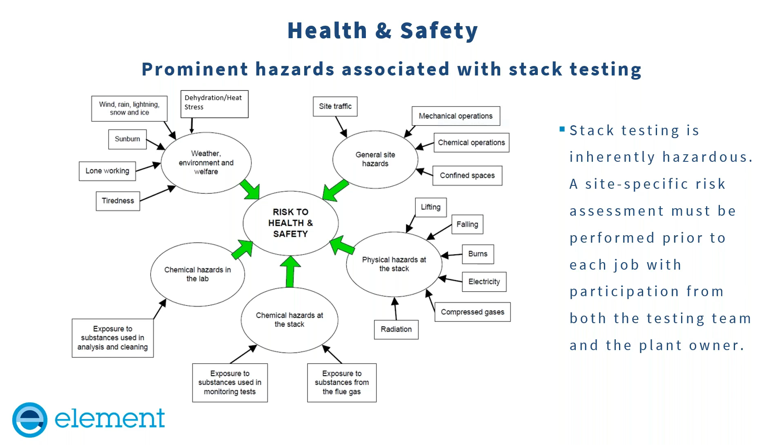So there's just some general risks there. I'm not going to go through them all, but as Stan said, this will be on a recording, and please take your time at a later date to look through these, and always take them into consideration when you are doing this type of work.

I think it's probably well worth pointing out that we are looking at point source emission testing, so it would be very, very useful, one would imagine, to at least decide what a point source is.

By definition, it's a single identifiable source of air pollution with a negligible area. It can be modelled as a single point, as a mathematical point in various modelling. It does not include diffuse areas of pollution such as roads or whole refineries, airports. It is quite simply a small single point located source, which may be a chimney, it may be a generator stack, or that type. But they're obviously very common, and it's worth having a look.

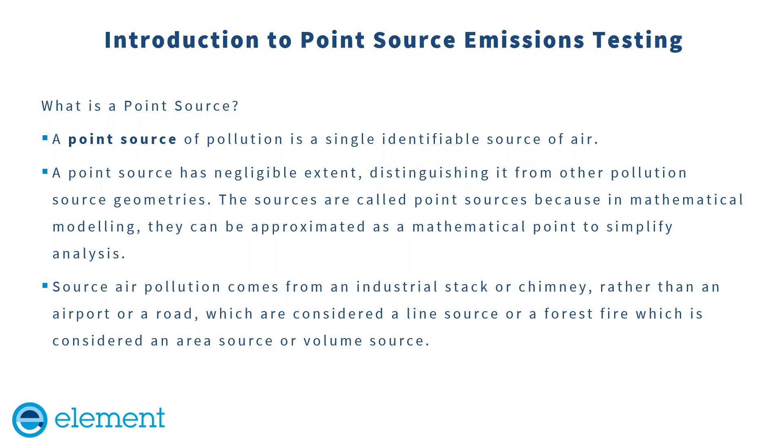and considered as a point source emission. We also find similar vents or stacks in industrial processes, refining, food manufacture, all sorts of industrial processes where those processes involve emissions to atmosphere. Even within petroleum industries, as I said, I'm based in the Middle East. A lot of refineries have point sources as well, where they are disposing of waste gases, solvents, etc. They may be flares. All of these are classed as point sources.

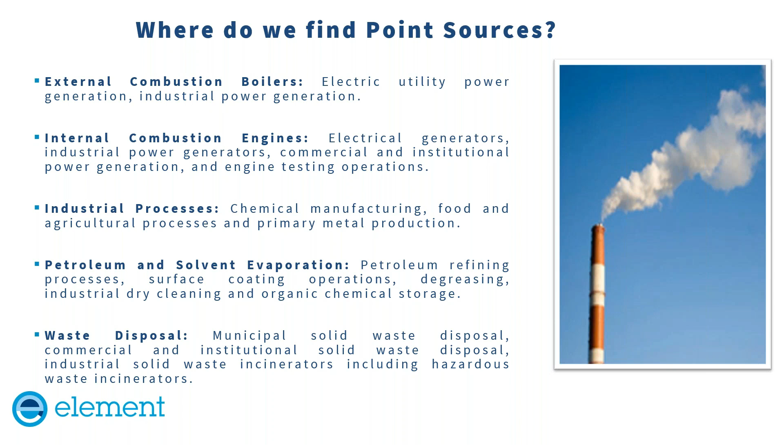What would not be classed as a point source in something like a refinery would be fugitive emissions from pipelines, etc., covering the whole area of the refinery. They're more diffuse and would not be taken as point sources. Other very common areas, waste disposal, a lot of interest these days in waste to energy. But clearly there are hazards or risks associated with burning waste, industrial waste, commercial waste, hospital waste. All of these incinerators have to be working efficiently to obviously ensure that there is no release to atmosphere.

In terms of doing the actual monitoring itself, as I alluded to earlier, there are three main ways of doing this. In the older type plants, this is done manually by periodic measurements by companies like ourselves, perhaps. We will come along once every 6 months, once every year. We will physically monitor the emission gases within those stacks using a number of techniques, methodologies, equipment that we'll talk about later. That is done in smaller plants, or in older ones, but more and more on larger scale type refineries, plants, certainly in power stations.

There is a requirement now from regulators, both nationally and locally, that these stacks will contain what's known as continuous emissions monitoring systems, or CEMS, where those effectively do what we do, but they have all of the emissions monitoring equipment installed into the stacks, so that they are giving real-time emissions data that is provided to the plant operators. And more and more these days, that real-time data is fed directly to regulators. So the regulators can be checking whether these plants or these particular stacks are meeting their emissions discharge consents.

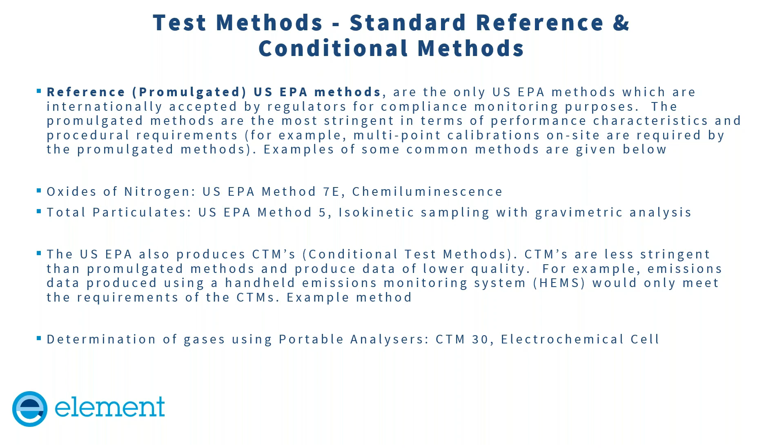So there's a place for both of these methods. Element carry out both, but in general, as I said, the reference methods are used for regulatory purposes. The conditional test methods are used as a rapid indication of plant operation, and if you're meeting those legal requirements. Move on from there. As I said, looking at the reference methods themselves, generally split into two as well. Sorry about breaking all this down into different bits, but you will have time to look at this online.

They're broken into two main categories: direct reading instrumental techniques, which are generally used for gases, where we are taking direct readings within the stack, and secondly, manual isokinetic methods, where we are abstracting gas from the stack, trapping that material onto filters or in some sort of trapping medium, caustic or acid, and then taking those samples into a laboratory for subsequent analysis. Isokinetic sampling is done for particulates and anything that may form particulates, such as PAHs, dioxins, metals, etc. They're not being read directly in the stack, they're being tested for outside.

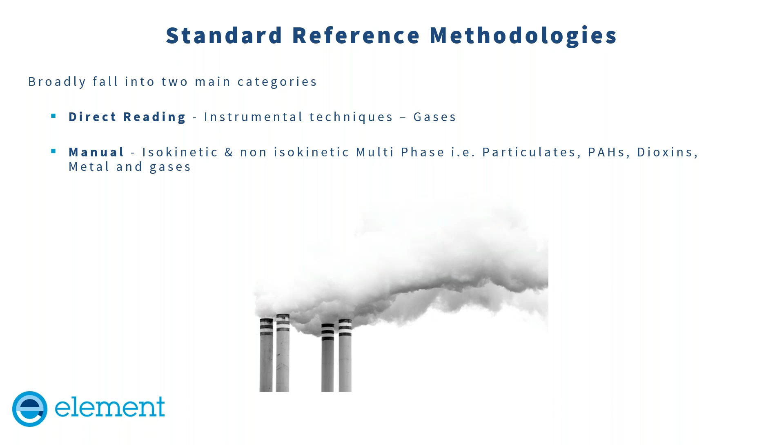In terms of direct instruments, just while we're on this, you can see a couple of very large stacks there, and you can see the platform at the top. That's where companies like ours or our staff would be operating at great height, and the analysis is performed in an air-conditioned lab at the bottom. There's a lot of equipment to be carried up there at great heights, so just to point out that all of these sort of things have to be taken into account.

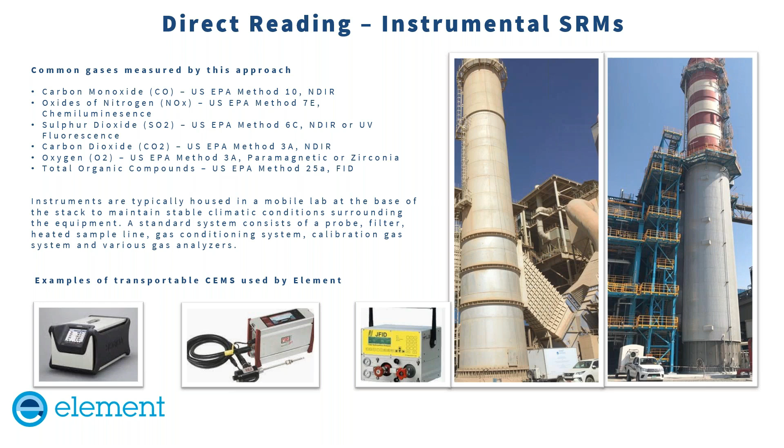As I was saying, there are also conditional test methods. You can see there the type of equipment that's used. It's a lot simpler. It will do multiple gases at one time and can be carried up, direct reading in the stack, US EPA CTM 30. Very useful, simple to operate.

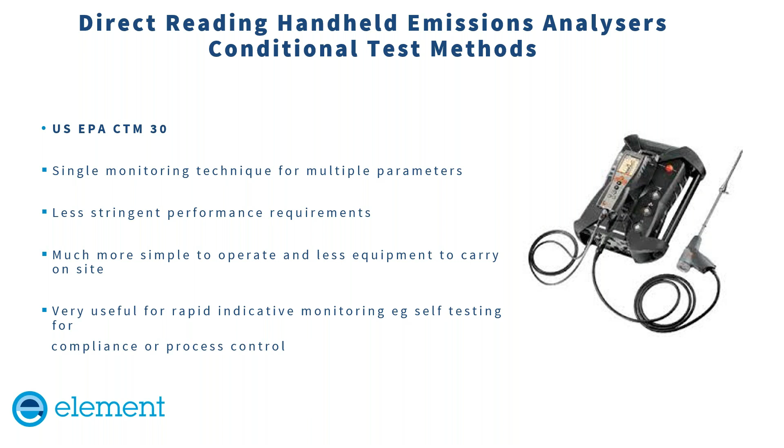It gives rapid, fairly accurate results. Very useful for just checking your own compliance, maybe getting information for process control or optimizing parameters. Very, very useful technique, and there is always a place for it.

Isokinetic sampling, as I said, is used for particular types of possible pollutants, such as dust, clearly PM10 or PM2.5, but also anything that will be trapped as a particulate, like metal particulates, even acid gases that will be in particulate water, any of these sort of things.

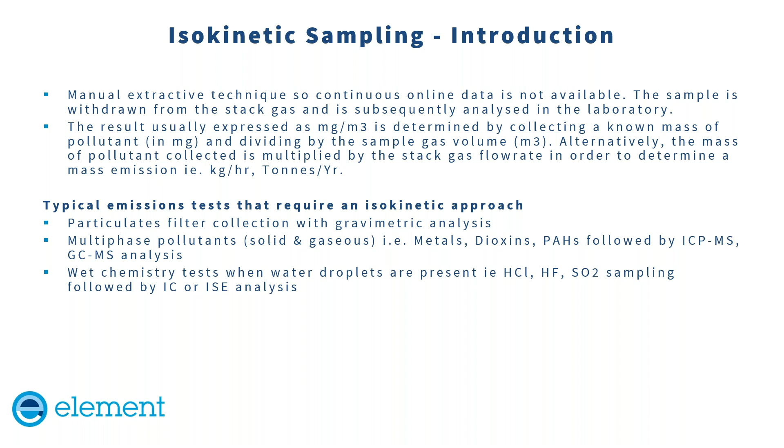So it's very important, because the analysis is not done directly from the stack gas, but we are taking a sample of that gas, trapping the contaminants in a medium, such as a filter or through acid or even in water. Then it's extremely important that we are able to extract that sample in such a way that we can tie the rate of that abstraction to the rate of flow within the stack, so that we can calculate the results in a meaningful manner, either as milligrams per cubic meter within the stack, or perhaps even as total emissions.

So isokinetic sampling, what does it really mean? Well, it's pretty obvious. Iso is from the Greek word meaning equal, and kinetic is movement. So what we are aiming to do here is to abstract the gas from the stack in such a way that we can relate the abstraction flow exactly to the flow within the stack, which will then allow us to calculate the results accordingly. So that's just a little diagram.

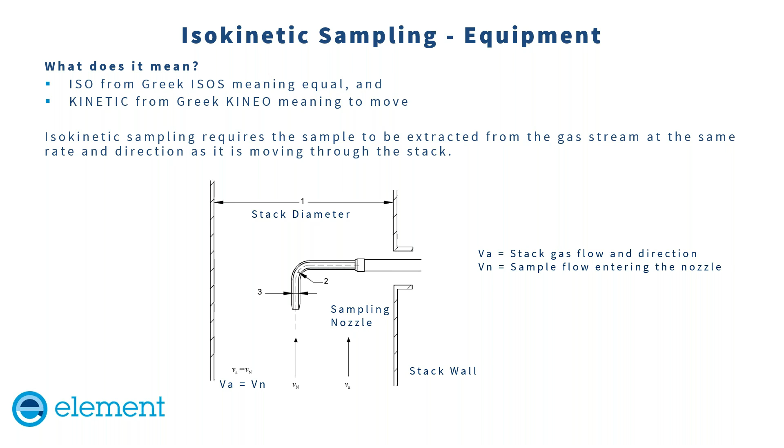So why do we do this? It's extremely important that we can relate the analysis results in the lab to the absolute concentrations or an emissions concentration in the stack. We need to do this because we can't sample the particulates easily, because there will be turbulence within a stack. There are gravity effects. Different thermal behaviors move particulates around.

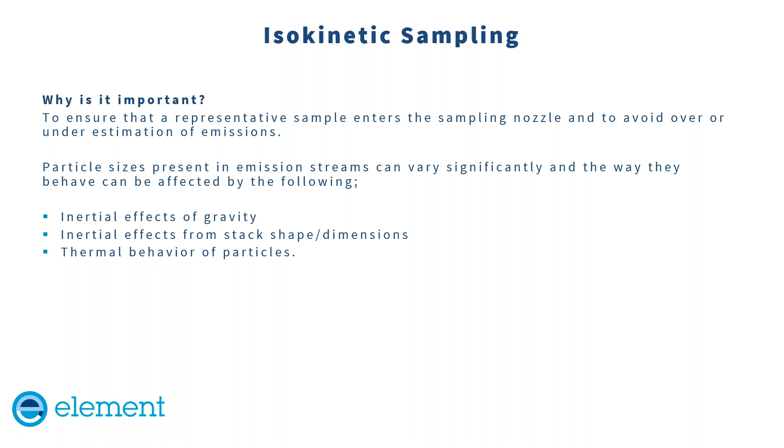So it's extremely important when sampling for particulates that this is done very, very carefully indeed, because, as I said, there may be areas of turbulence within a stack that may be caused by other probes within that stack. It may be caused by bends within the stack. There may just be thermal turbulence. So it's not a simple matter of going along, putting a probe in and abstracting a sample.

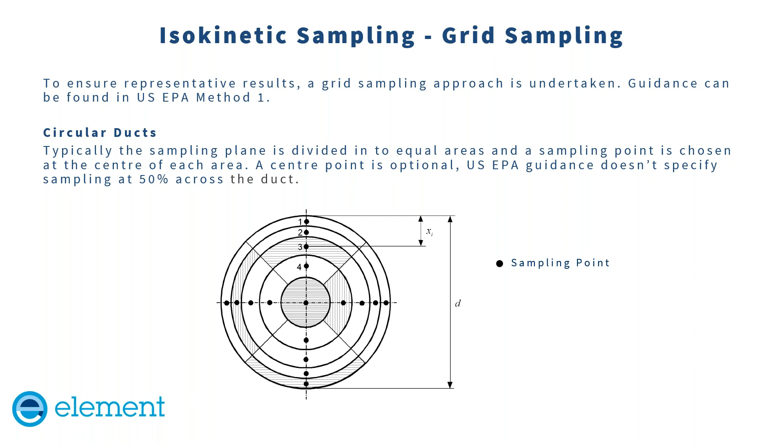Again, for rectangular ducts and other shapes of ducts, there are certain geometric sampling points that we have to be taking to ensure that our isokinetic samples are representative. All of this type of information needs to be known prior to us arriving on site, so that we have the appropriate sample probes and know the number of locations that we need to be taking. So it's all about planning and making sure that the appropriate reference methodologies are followed.

Again, I talked a little there before about the facilities that we will need to do this sampling. We have quite a lot of equipment that needs to go up to these sampling ports.

Some of these probes on large stacks, we are looking at up to 4 sampling probes or sampling points in the stack at 90 degrees. We can usually get away with 2 at 90 degrees in some smaller stacks, but all of those types of sampling ports have got to be there. We've got to know that before we start.

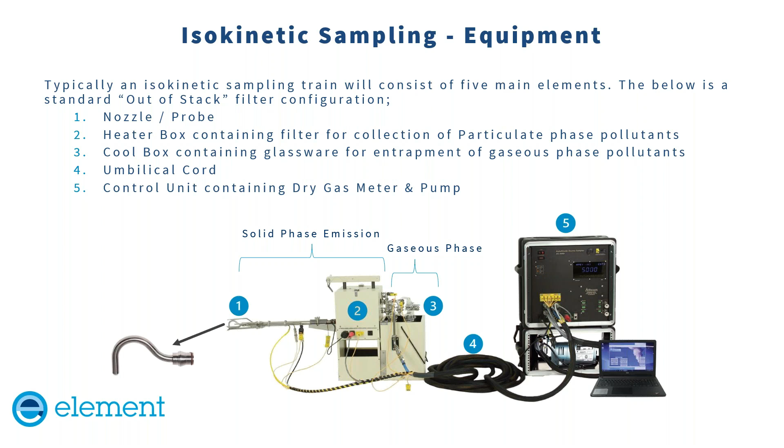So again, it's not just a case of putting that on someone's back and climbing a ladder. Are there winches there? Have they been tested? Is there sufficient room for us to be putting this equipment on the sampling platforms? Just to give you an idea of what this stuff looks like. Just to go through that again.

Where are we looking to put these sampling locations? That's very important. We want to avoid disturbances within the flow as much as possible, away from bends or fans or any other probes that may be present. We're looking for ideally a vertical sampling plane, but we can do it horizontal. We're looking for reasonable flow rates, so there's not too much swirling or flow within the sampling ports.

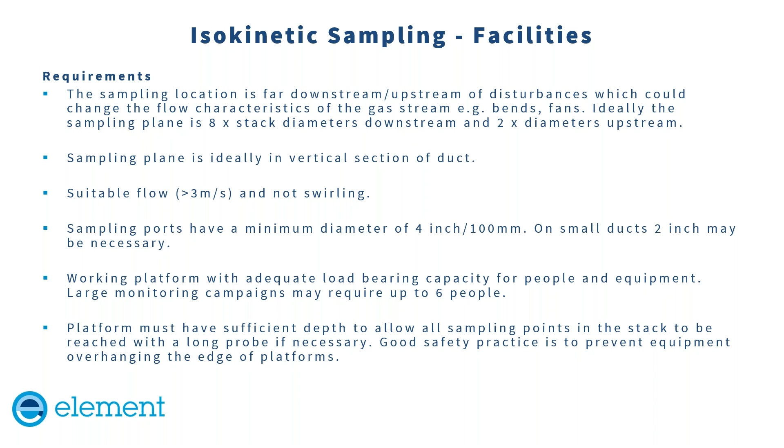If you're doing isokinetic sampling, we're looking at preferably 4 on large ducts or stacks, 100 millimeter to 125 millimeter diameter as a minimum, to allow us to get the probes and the sampling ports in there. And again, I've said before that the platform has got to be adequate in terms of load-bearing capacity, winches, getting a number of people up there safely and operating safely. So all of these things are things to consider when we're doing this.

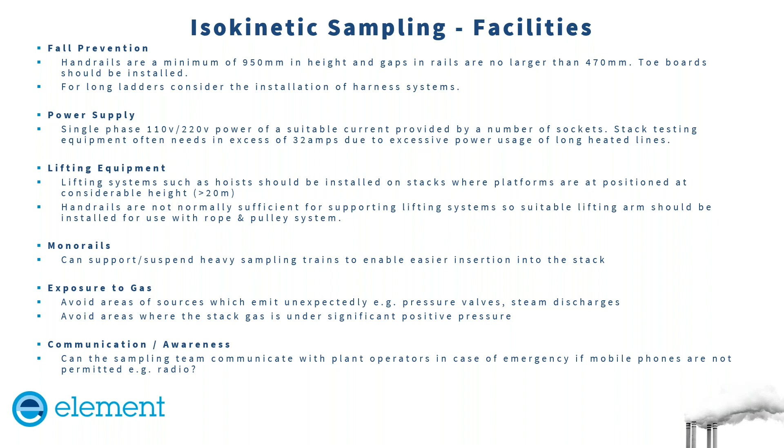Again, just having a quick look at this, and as I was saying at the very beginning, this type of work is inherently dangerous. So it's very, very important that each and every one of these potential risks are looked at and considered prior to starting any site works, to make sure that everyone is safe.

That covers quite simply a lot of the manual periodic monitoring that ourselves and various other companies like us would do on behalf of clients. Generally, for clients who don't have their own emission systems in place, we would do this on a 6-monthly or a yearly basis, provide them with the data that they can provide to their local or national regulator to ensure that they are meeting their discharge consents.

In the last maybe 10, 20 years or so, more and more requirement is coming in, certainly for larger plants and for new builds, that these stacks are equipped with what's known as continuous emissions monitoring systems. As I said earlier, basically these systems are what we do, but built into the stack themselves.

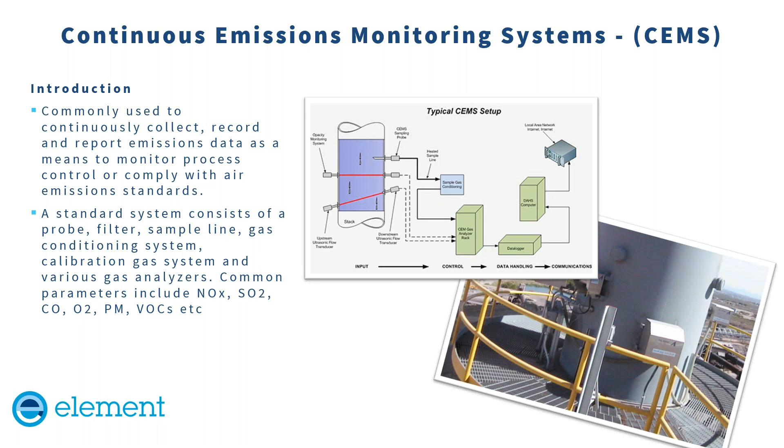This can then be used, as I said, not only for real-time data for regulators, but also to allow the plant operators to optimize the processes. Very commonly, CEMS will do NOx and SOx, etc. However, that's all well and good, but how do you prove that these CEMS work?

For two reasons. If you're a plant operator, then you may purchase a CEMS or as part of the commissioning. But clearly, you want to know that once that CEMS has been installed, it is meeting the requirements that you set while purchasing it. And also, the regulator will require that the operators can prove those CEMS are working before they will give them a license to operate. So there are quite a lot of standard CEMS quality assurance procedures.

We do a lot of work out here in the Middle East based on US EPA standards, but certainly we also do work on European standards as well, and I'll talk about them in a minute. But in terms of the US EPA, for CEMS, there are two main regulations: US EPA 40 CFR Part 60 and Part 75. So what are the differences in these? Let's have a quick look at that.

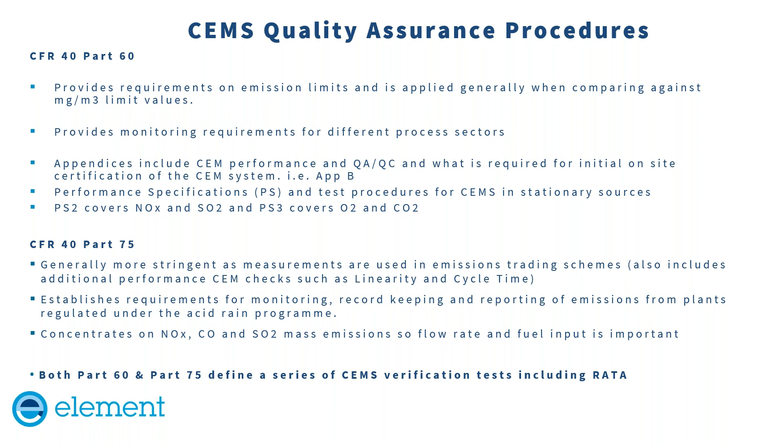But both of these requirements include what's known as RATA, which is a relative accuracy test audit, which is used to prove the accuracy or otherwise of those CEMS. But I'll come to that in a minute. As I said, relative accuracy test audit. What is it? It's a way of proving that if you have installed a CEMS, that CEMS is working.

At its simplest, it's a matter of comparing the data on the CEMS with data generated by companies like ours, doing simultaneous monitoring using reference techniques, US promulgated methodologies, and making a comparison of those sets of data. Clearly, there are then acceptance criteria for those data, which vary slightly between Part 60 and Part 75. But this is an absolute requirement if you are installing CEMS. Clearly, you want to know if it works, and the regulator wants to know if it works as well. So that is done by what's known as RATA.

As I said, there are many reasons to do this. The principal one is that it's required by the people who are buying it and the regulators. If you've got a CEMS, and I've said PEMS, we'll come to that in a few minutes, those continuous systems, whether they are actual monitoring systems or predictive systems, you have to be able to prove that they work. And as I said, that's where companies like Element come in to provide that testing.

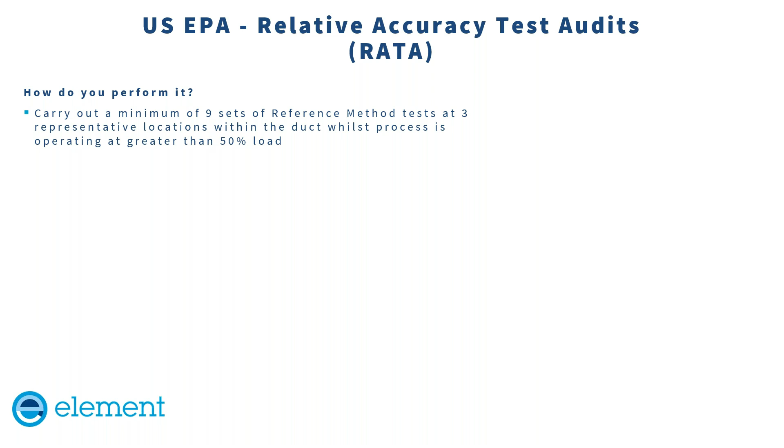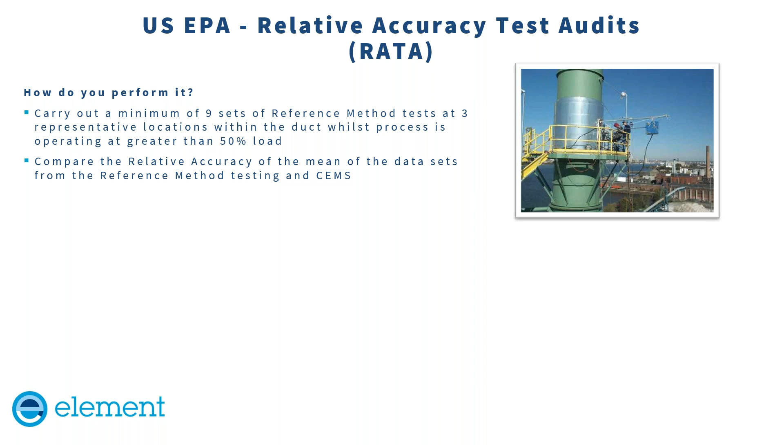In terms of how we would do RATA in particular, you carry out a minimum of 9 sets of reference tests at 3 representative locations, greater than 50% load. So it's multiple sampling across multiple locations on the plane within the stack. We need to be collecting adequate data to ensure that statistically that data is valid, and then we compare that data against the data that is output by the CEMS.

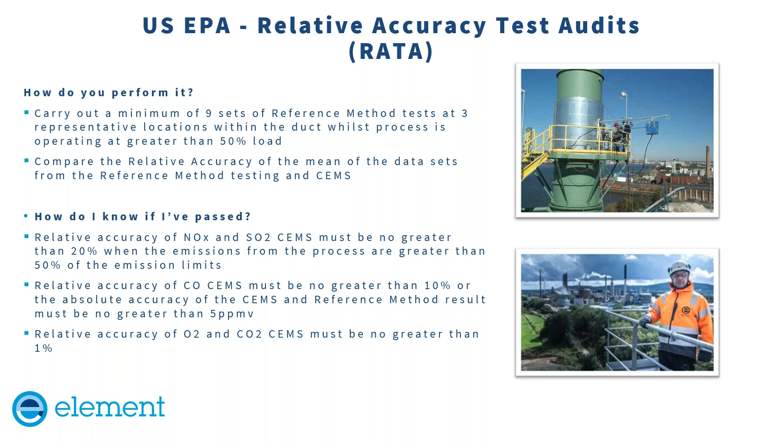And again, that's just a little bit of information as to then what we do with that data. There are various allowable tolerances depending on the types of gases, the concentrations expected, and we would then make those comparisons and write reports to see whether that particular CEMS has passed the RATA test and is therefore fit for purpose.

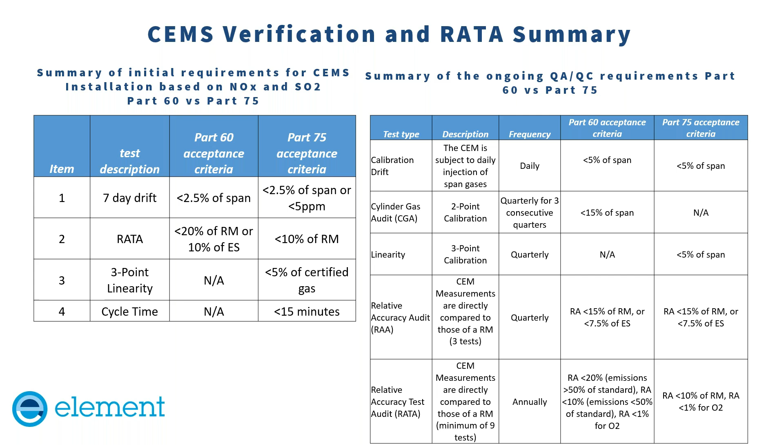Just a little word about the European standards, which again we are being asked to do a bit more here in the Middle East. EN 14181, which has QAL 1, QAL 2, and QAL 3, and what's known as AST is the annual surveillance test. QAL 2 is the equivalent of a RATA test. That's slightly different. But they differ a little bit in terms of the amount of testing required, but generally they are very similar.

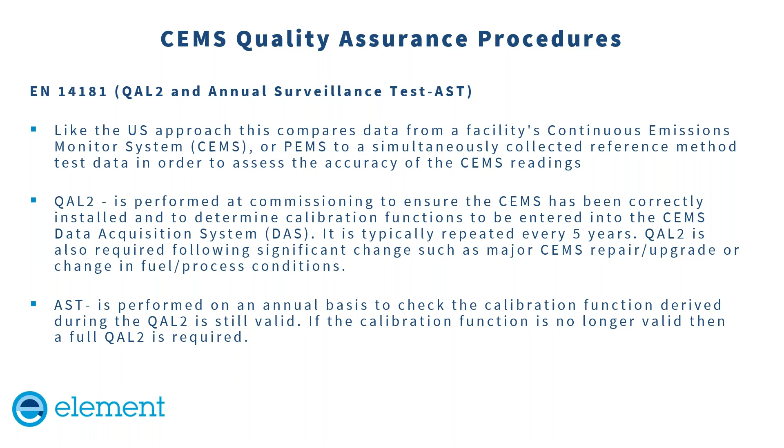The difference in QAL 2 is that in RATA for US EPA, if you're following the EPA regulations, Part 60 or 75, RATA has to be done annually. Whereas the QAL 2, which is the commissioning test under EN 14181, has to be done every 5 years. However, they have what's known as the annual surveillance test, which is effectively a reduced QAL 2 to be done on an annual basis.

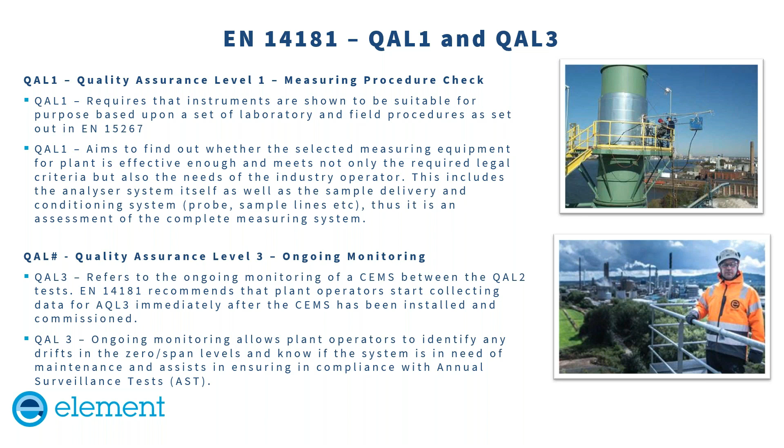So it's a reduced QAL 2, but there are certainly equivalencies between the European standards and the EPA standards, but it is important to be aware of what is required within your particular geography. As I said, QAL 2, 15 sets of reference over 3 days, but it's only done at commissioning and then done once every 5 years. And then we have what's known as the annual surveillance test, which is 5 sets of tests.

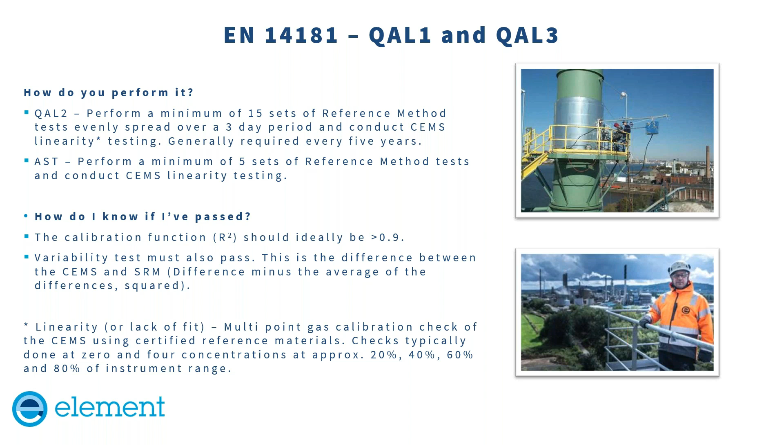Very similar to RATA. Again, there is obviously in the standards performance criteria that need to be met, which is again just simply comparing the data obtained by companies like ours using essentially a mobile CEMS against the installed CEMS. So you can have a look at that later, but it's important, as I said, to know what the regulations are in your particular geography.

And more going forward, we found that people are working towards PEMS. So it's now becoming quite common. It was used less frequently, or a lot of regulators were uncomfortable using PEMS because the software in a lot of the models had not been developed adequately in their opinion. However, that's moving. What PEMS are, as I said, they are completely software solutions that take input data and on the basis of that input data will output a predicted emission.

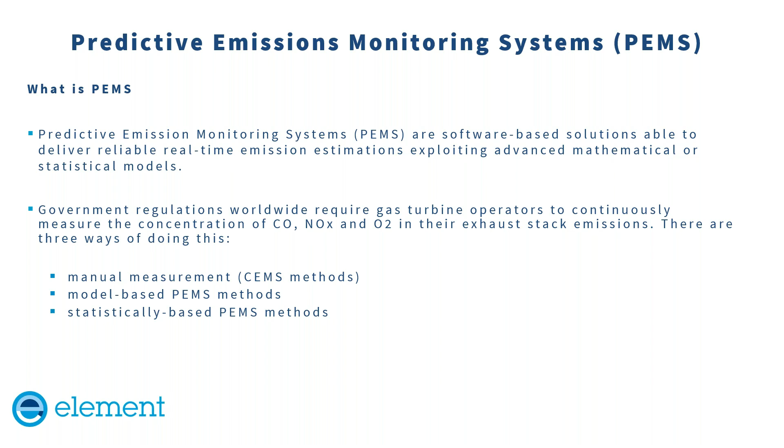So effectively we have different methods of doing this now. More and more governments are accepting PEMS, so they are becoming much more common. As I said, they are predictive. They do not take any real-time readings. They will take the input data to the stack, the composition of the gases, the turbine temperatures, pressures, humidity, etc., the type of fuel, and then they will, on the basis of that, make a prediction as to the various emissions that are being produced.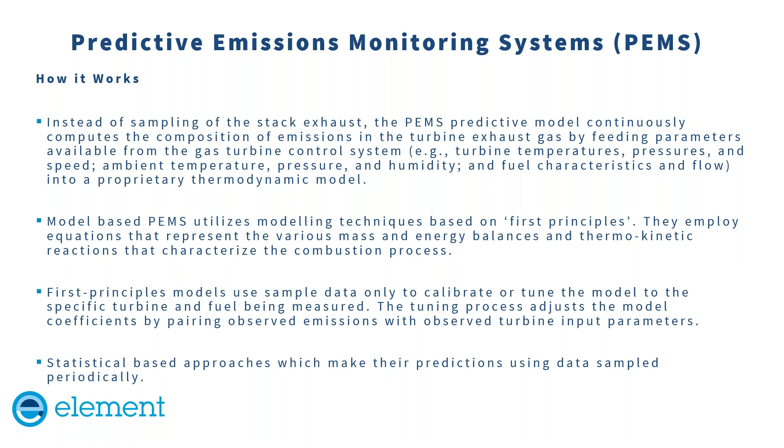These are becoming much better now in terms of a lot more information, a lot more data from the companies who have put these in place. So they're becoming much more accurate now, and as I said, because of that, they are now being accepted much more readily by regulators globally.

PEMS is treated very much like CEMS. You can't come along and say, we've bought a PEMS system, thank you very much, regulator, this is the output data. In that respect, PEMS is very much like installing a CEMS. You need to prove that it meets its requirements.

We do a lot of work on PEMS. As I said, the companies that produce these models have got a lot of background data, so they usually start with a reasonable set of software algorithms, but in each case it needs a bit of fine-tuning.

So we will go out and collect real-time data that will then be compared to the predictive data, which will allow the PEMS providers to do a bit of fine-tuning on the software to ensure that eventually they come to a system where the predictions are meeting the true values that we're getting. But again, that all has to be done initially.

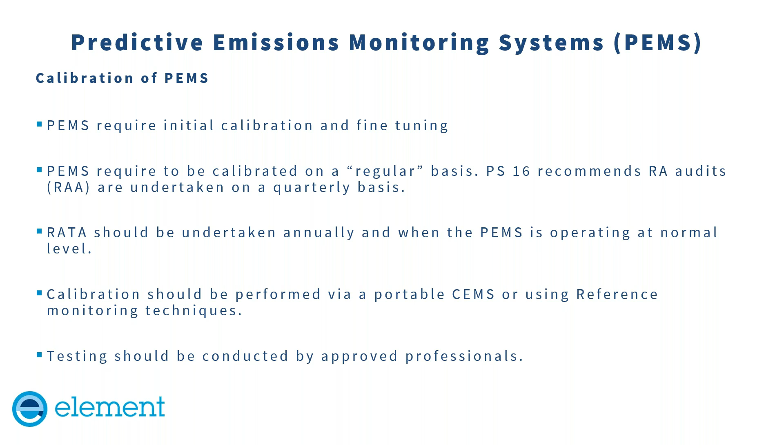Again, we need to do RATA on PEMS once it's installed and before it's allowed to be used, very similar to how we would do with the CEMS. And thereafter, there are requirements for ongoing monitoring of these PEMS.

So, just looking at this, as I said, the PEMS need to be calibrated. You have to be able to prove that the predictions from these software algorithms are actually matching the true emissions. So again, we're looking at this in terms of doing a calibration, doing a RATA testing on a PEMS.

We're looking at doing this at the 9 referenced methods, but generally we're looking at doing it at different loads. You've got to be able to prove that your algorithm is working effectively at the different loads that perhaps the system may be operating at.

And again, we're looking at what's known as a relative accuracy audit on a quarterly basis, which can be reduced to 6 monthly. But even PEMS require annual RATA to be done by external parties like ourselves, using reference methodologies. But as I said, they are becoming much more accurate now and much more widely implemented and accepted. As I said, that's the future.

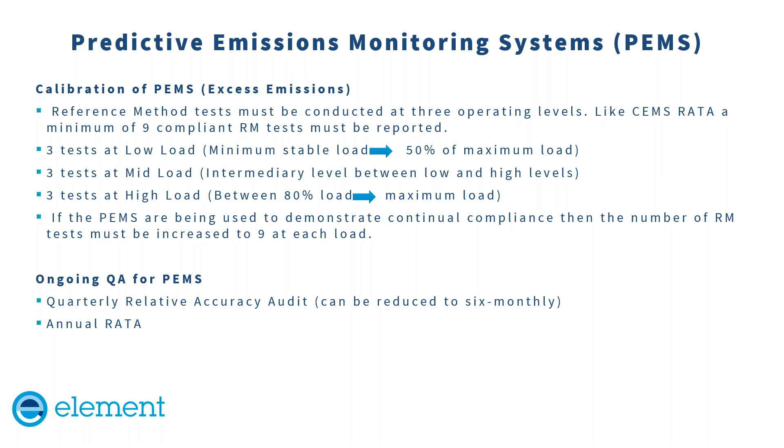The future is moving from a lot of manual monitoring, which still will be carried out in smaller plants, towards CEMS, and now CEMS is also being replaced by PEMS. But before we finish, it's probably worth a quick word as to the disadvantages and advantages of them. The advantages of CEMS.

CEMS actually provide real-time direct measurement data. You are having probes within the stack taking measurements using reference methodologies. You, in many ways, can't get better than that, assuming that your CEMS are working accurately. So the results tend to be more accurate.

As I said, they're more widely accepted because of that by governments and regulators, although certainly in the last year or two we have seen a significant move towards PEMS, principally because of the improvement in accuracy of PEMS. So again, there are certain advantages of PEMS over CEMS, there's no doubt about that.

PEMS can be much cheaper. There's no hardware. You're not having to put stacks and platforms and probes and all sorts of monitoring equipment there. You are simply monitoring the input data to the stack. So typically PEMS can be 20, 30, 40% the cost of a CEMS. As I said, there's no hardware involved, so that's much better.

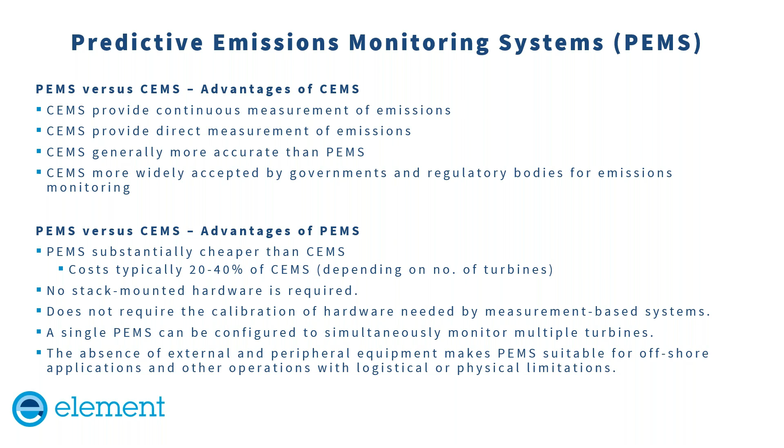Also, because PEMS doesn't actually have any physical monitoring equipment, it can be used on smaller stacks, distant stacks, etc., where installing physical monitoring equipment may be difficult, on rigs, etc. So there are major advantages to PEMS, and as I said, they are now becoming much more accurate, such that they are being accepted.